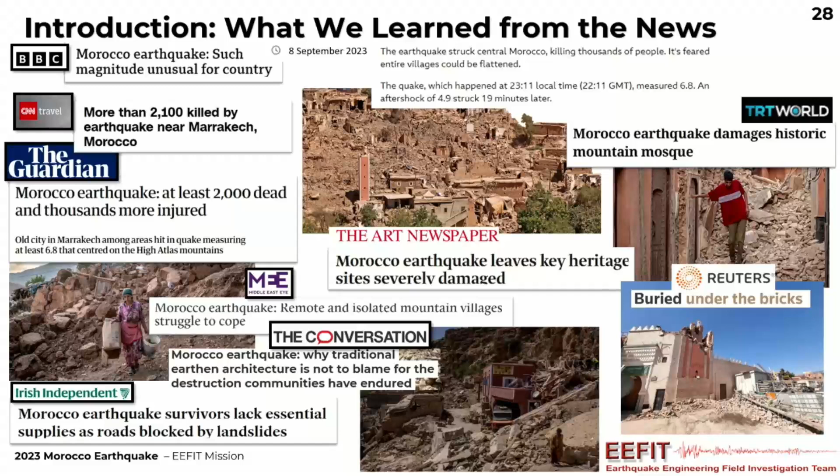As usually happens when this type of event occurs, the news coverage highlighted the human impact, but there was very limited detail about the technical aspect of what happened on the field.

So EEFIT, as soon as this earthquake occurred, decided to launch this eight-man project that, as has been mentioned by Mike, we actually at that time were running out of funds. So we applied for UKRI funds under the NERC urgency grant, and we got a grant for 18 months.

This was to assess and try to understand much better the earthquake process in arid mountain environments, combining multidisciplinary expertise across structural engineering, geotechnical engineering, geology, geomorphology, and remote sensing.

The idea was to use this time to try to understand the key factors driving landslides, and also the geotechnical building failures at urban scale and also at more detailed scales.

All of this was aimed at trying to understand how we could reduce the impact of future earthquakes in Morocco, but also in other geographical settings that are very similar to Morocco from a geomorphological point of view, and also buildings.

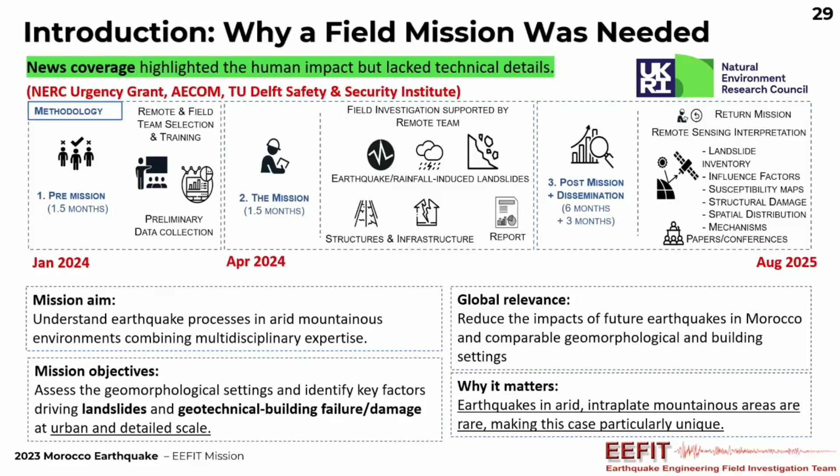These missions were led by Fabio, Mike, and myself. As soon as these earthquakes occurred, we asked EEFIT members to express their interest in participating in these field missions, and based on their expertise and interest in the mission, we created different teams.

As you can see, we had a landslide team, a structural team, and also a remote sensing team. All the expertise was fundamental considering the type of events that occurred.

Also, we had support from remote sensing, and then when we started the project, we found out the way to collaborate with local partners. We had local partners from universities and NGOs that have been fundamental from the logistics point of view, and also to understand exactly what was happening on the ground.

Having said that, I'll pass the floor to Mike so you can talk about your part. Thank you very much, and thank you, Fabio.

What I'm going to be taking you through is the geological aspects, and then the earthquake-induced landslides, which was one of the core reasons we were looking to investigate the Morocco earthquake, and also some of the geological and geotechnical observations that we observed.

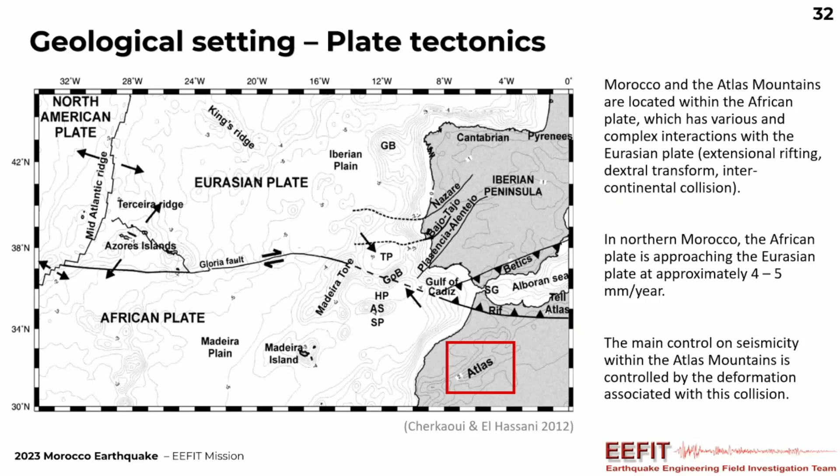4 to 5 millimeters per year, and that's the main control of seismicity within the Atlas Mountains, controlled by this deformation associated with this collision, which is why this sort of event is quite rare at this magnitude.

Historically, within Morocco, there have been about 25,000 earthquakes in the region since 1901, but only about 9 greater than magnitude 5.

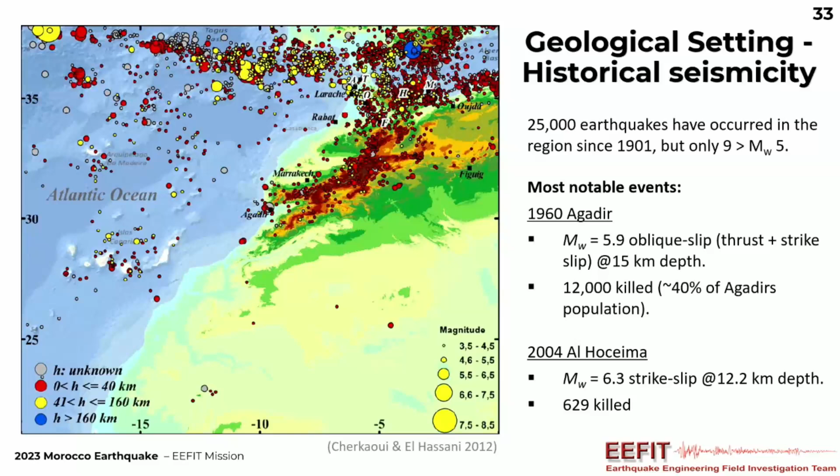The most notable events were in 1960 in Agadir, a magnitude 5.9, which killed 12,000 people, and then in 2004, a magnitude 6.3 killed 629. So large events in Morocco are quite rare.

So the main shock occurred here on September 8th, a magnitude 6.8 with approximately 3,000 fatalities, and it was the most deadly since the 1960 Agadir earthquake.

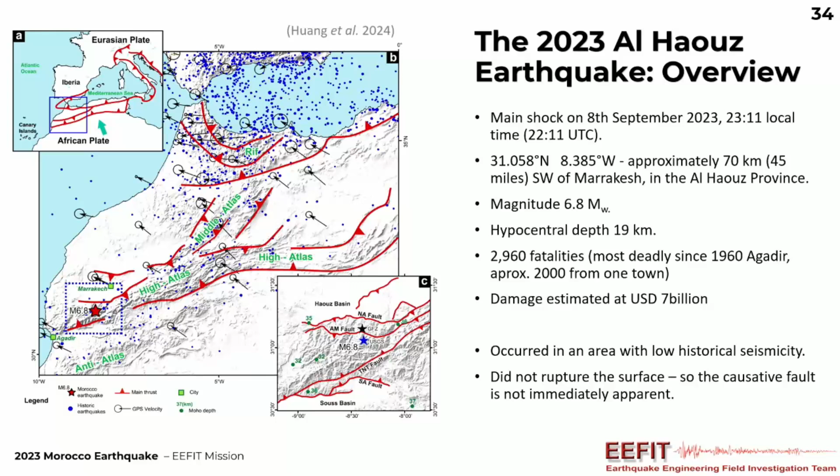Unfortunately, approximately 2,000 people from one town were killed, so a large number came from one village or one area. The damage estimation was estimated at 7 billion, and it occurred within an area of low historical seismicity, and it did not rupture the surface, so the causative fault is not immediately apparent.

So the initial thoughts and theories were that there were two possible mechanisms: on the left-hand side, a high angle north-northwest dipping fault, or a low angle south-southwest dipping fault.

That was the idea, but the aftershocks after the event seemed to indicate that it was more aligned with the low angle fault.

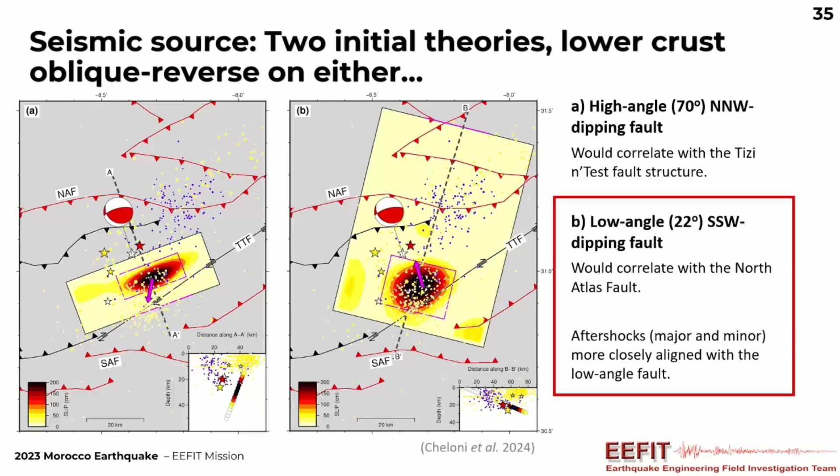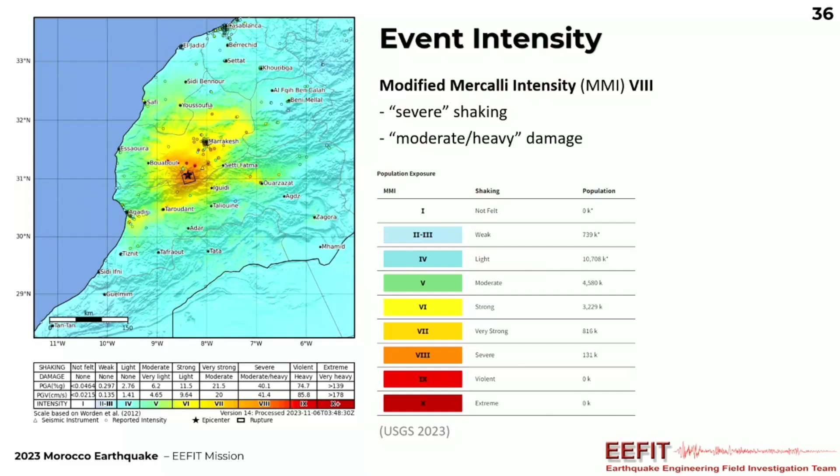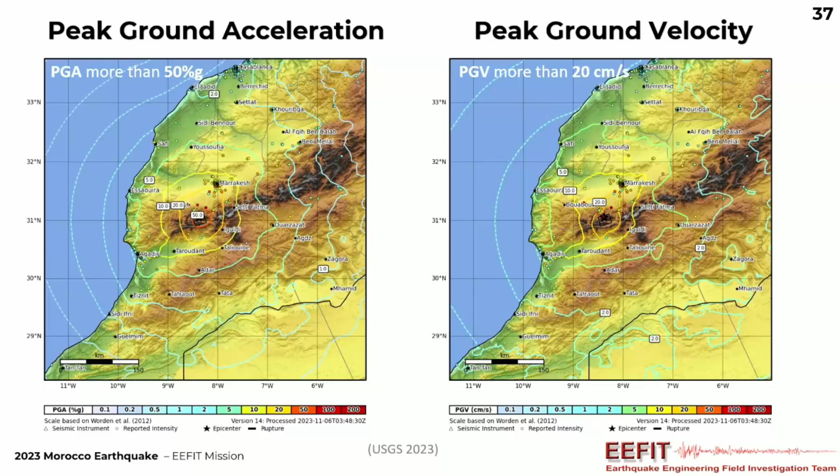The event was recorded on the Mercalli scale as being severe, with moderate to heavy damage within the area. Peak ground acceleration ranged from around 50, with peak ground velocities in the region of 20.

So that gives you a little bit of the geological and seismotectonic background.

This basically focused our minds around the NERC grant and the EEFIT mission, looking at earthquake-induced landslides and the impact that they might have.

One reason we're interested in these landslides is they not only have immediate impact following the event, hindering the immediate rescue and recovery, but they also have long-term impact in the landscape, causing decades-long impact, potentially leading to future landslides and future impacts in the area.

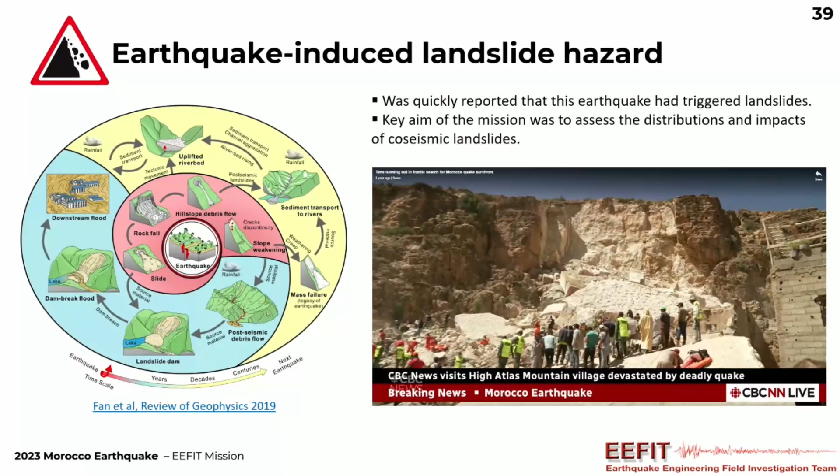So it's a really interesting case study of looking at why these landslides were occurring and the impact that they had.

So just to talk about the geological setting again: it's an intraplate tectonic setting where large earthquakes are rare. Its climate is arid, and the typical relief of the area we investigated was 2 to 4 kilometres.

For the non-specialist, the bedrock geology was quite broad - shown here on the geological map as a range of Cambrian schists, Jurassic limestones and Triassic sandstones. The soils, which we'll come onto later in the geotechnical observations, were typically coarse quaternary alluvial gravels.

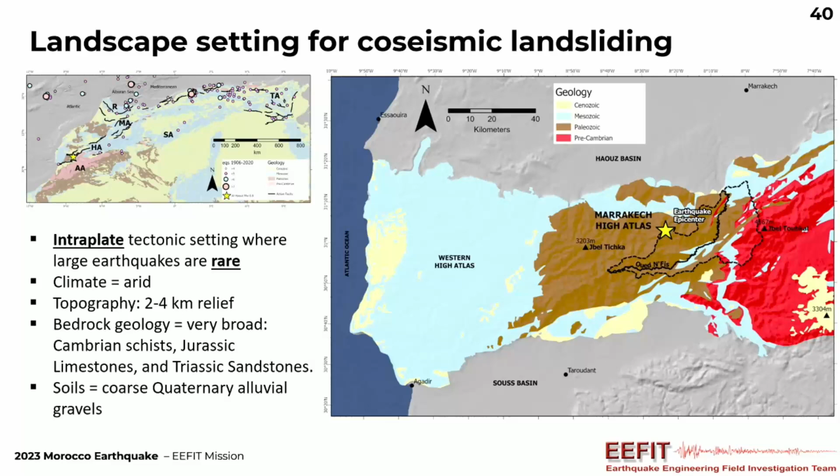Our initial approach, as Viviana talked about setting up the mission, we had a 1 to 2 month window before we launched in person, and looked at using a range of remote sensing techniques - lessons learned from the Haiti mission, which we did remotely, gave us the opportunity to investigate techniques applicable to post-earthquake, post-disaster scenarios.

The team from Delft, led by Georgia, initially looked at using synthetic aperture radar, supplementing that with optical imagery. This lets us cover a huge amount of area very quickly and start to pick out some of the major features.

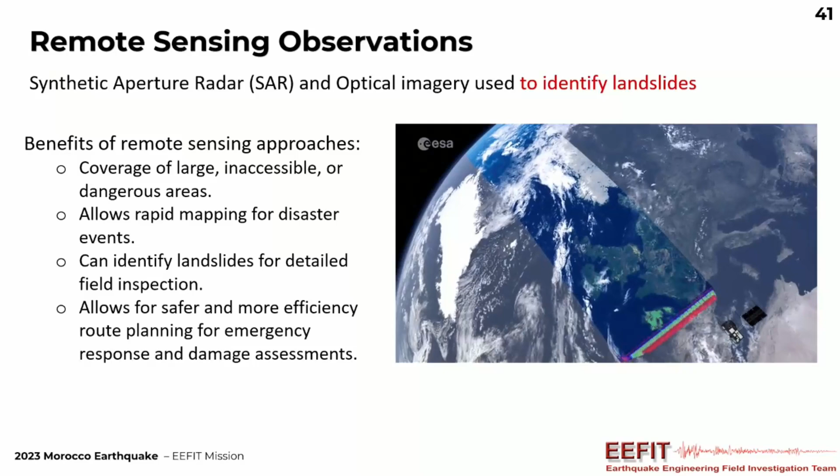It also allows for effective planning of the mission. Obviously the mission is only a week, 10 days, and this allows us to focus effort on the areas of most interest.

We'd had quite a lot of success looking at using SAR to identify landslides, using the intensity map when we did it from Haiti.

But what we found, using the Sentinel imagery which was 10 metres, was that it proved insufficient in this case.

The problem is that in Haiti, the landslides occurred in highly vegetated areas which became devegetated, so the contrast and intensity on the SAR amplitude was quite high, and they stood out. But in this arid climate, the landslides were much smaller, and the intensity and reflectance contrast between the landslide and the arid environment was not strong enough to effectively pick these out at 10-metre resolution.

At 10-metre resolution, you're typically going to be looking at a landslide greater than 100 metres squared - it's got to be a reasonably sized landslide. You can't pick out a 10-metre landslide; you've got to have several pixels. And you'll see from some of the photos and images that a lot of the landslides were quite small.

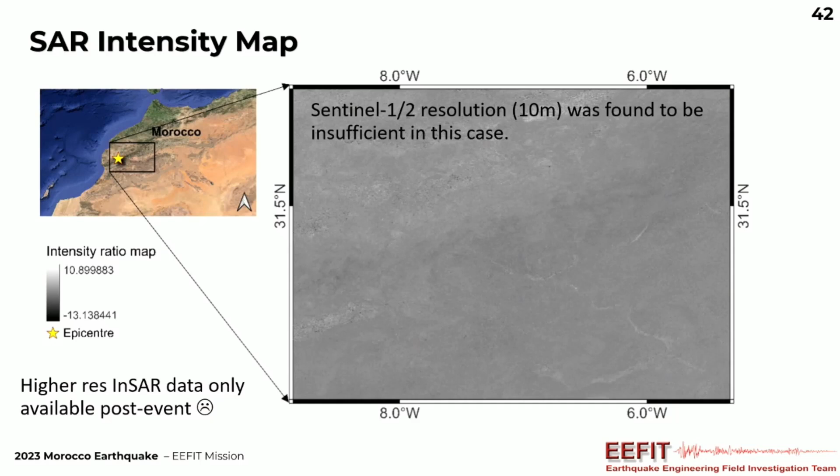Unfortunately, the higher resolution InSAR data was only available post-event, so that's in the centimetre to metre scale. We didn't have pre and post imagery to identify the landslides, so that took us back really to the times pre-InSAR, where we were looking at optical imagery. We were quite fortunate that Maxar released quite high resolution, 30 to 15 centimetre data, pre and post imagery.

In the centre there, pretty much the area where we had good pre and post imagery is shown in green. In orange was where we basically had no post imagery, only pre. But you can see we had quite good coverage adjacent to the epicenter.

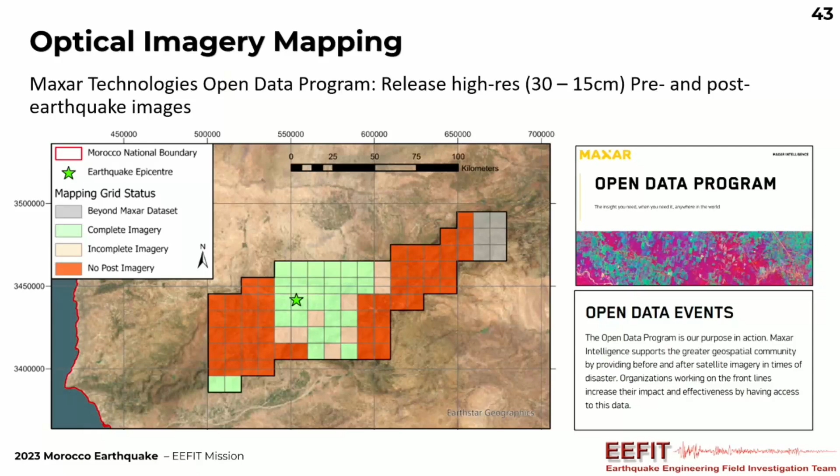So this is an example of the Maxar data pre and post imagery. You can see the before, and then the red dots picking out some of the landslides after. As you can see, there's quite a lot of distortion within the imagery. This is basically geodetic, so it's not really been topographically corrected. This actually caused a lot of problems in being confident in a lot of the landslides we identified, and obviously there were a lot of data gaps that also hindered.

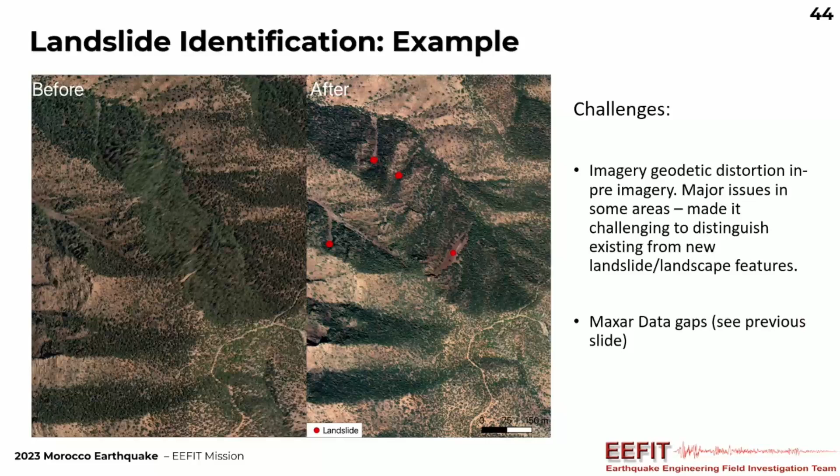But we were able to identify quite confidently 464 landslides. Since the field mission, we are actually going back and remapping with that renewed confidence of what we're actually seeing in the aerial imagery, of what is a landslide and what isn't. It's likely that this number will increase slightly.

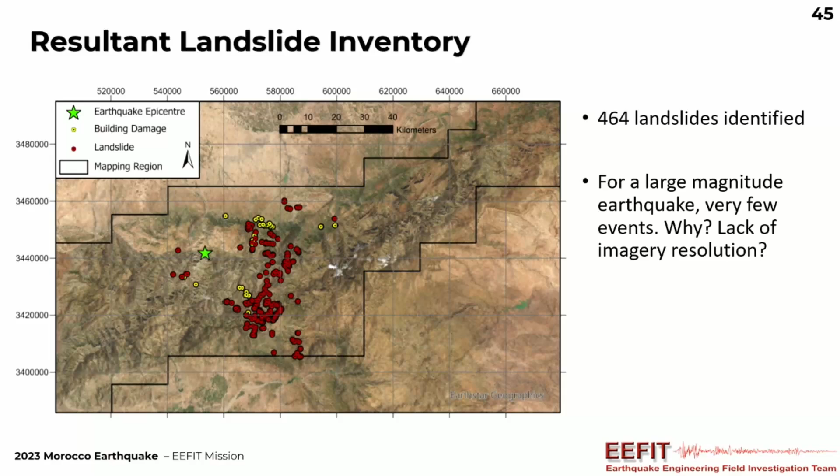For those who attended any reports on the Nepal mission, 464 compared to Nepal, where they had over 26,000 landslides. So compared to what the news said, to what we actually saw, the perception that there were huge amounts of landslides was not actually the case. So why was that? That's really one of the research questions we're still investigating.

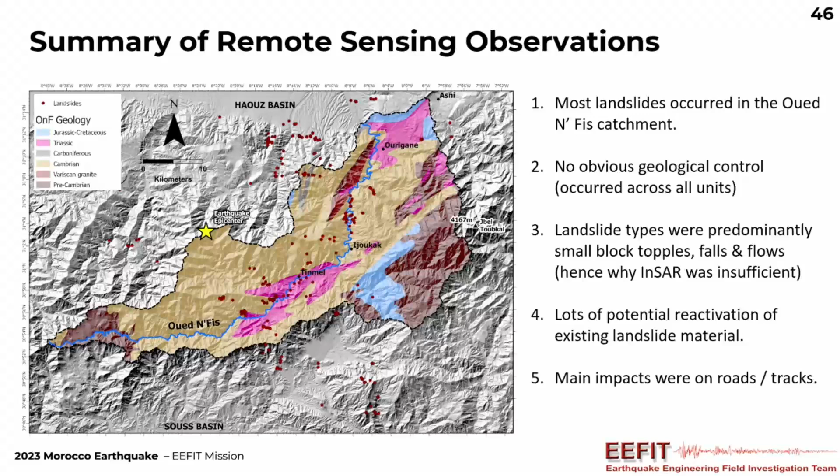So that was really the remote sensing aspect. What we then went to do, just a very quick summary, is looking at the field validation for the landslides. We used one of the main roads, the R203 I think it is, mapping along that road route, which is where a lot of the landslides occurred within close proximity.

What you can see is a lot of these are initiating at sharp breaks in slope or changes in slope, which is quite classic for earthquake-induced landslides. There's quite a lot of work that's been done which identifies topographic amplification and topographic effects that have quite a significant control on landsliding.

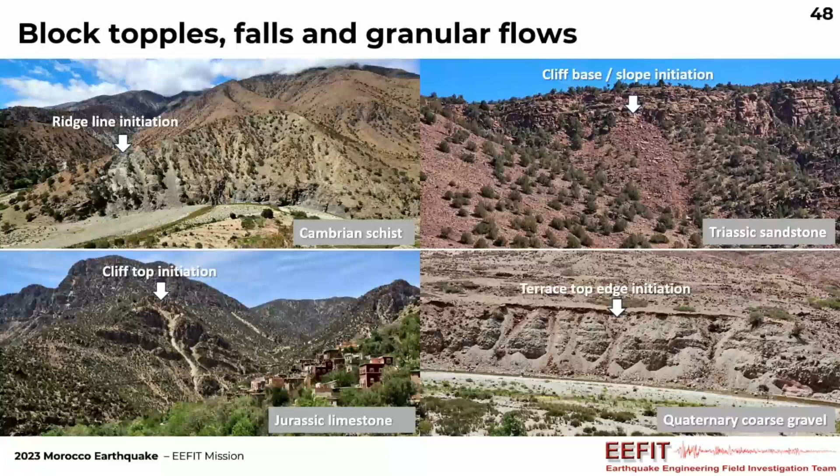Now we do have a little bit of a problem. There has been quite significant reactivation of existing landslide material, so obviously that's a causative factor, looking at where existing landslides were. But some of them, both in the field and within the aerial imagery, was quite difficult to identify whether reactivation had occurred.

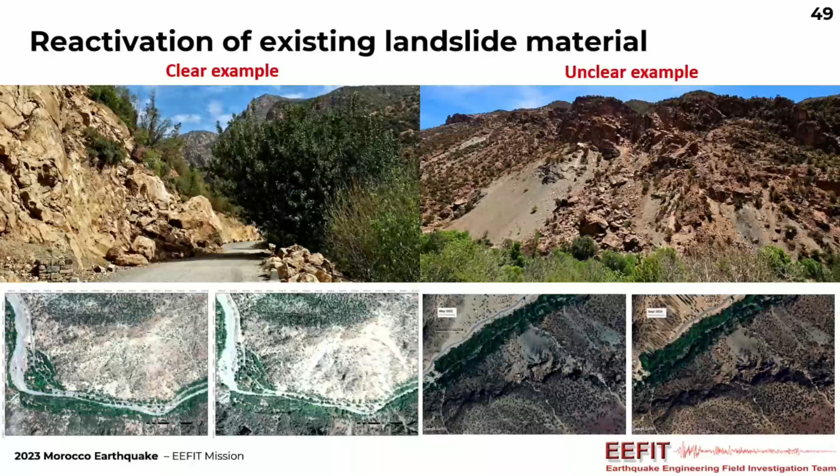But it's also worth bearing in mind that this is a very rural community, and rural tracks are also quite significant, as that's the way they travel to get into the remote areas where their villages are - we're talking motorbikes and on foot. So a lot of rural tracks were also impacted, still ongoing over time. We did identify some minor impact to telecommunications, but by the time we visited in the mission, that had already been repaired, so quite quickly after the event.

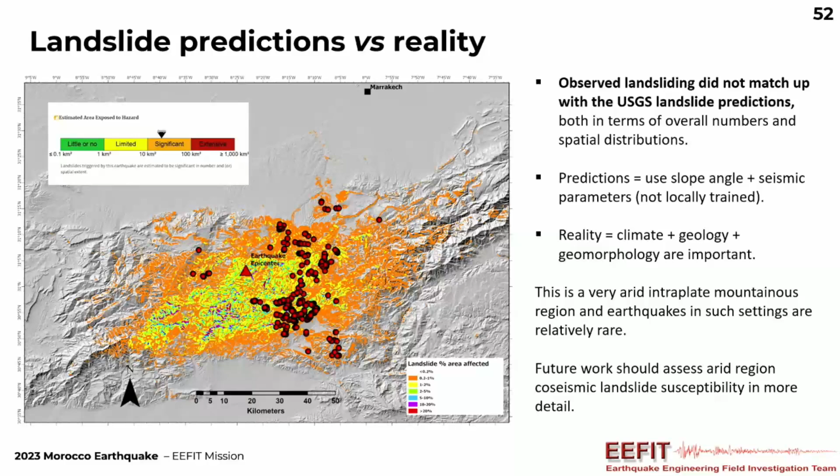So this is something we probably need to investigate further in the future. So just very quickly, some of the geotechnical observations beyond purely the landslides. Now, interestingly, there were not as many as we'd anticipated. That wasn't due to the earthquake, it was just the fact that not a lot of geotechnical structures really existed. So this is just some slides.

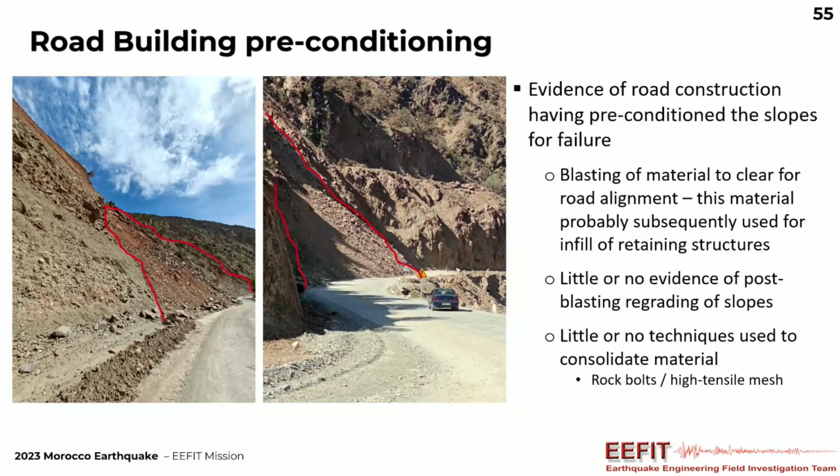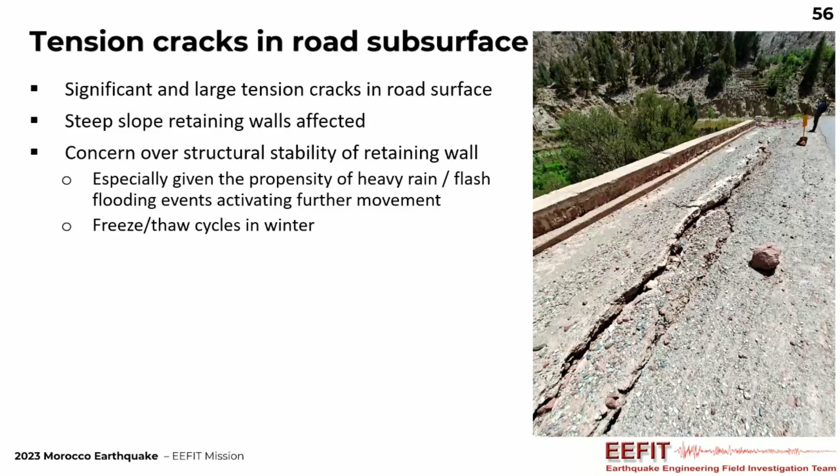We identified also a range of tension cracks within retaining walls and minor impacts to structures. The fact that we only saw a few is because only a few really existed. In this case, it was really probably due to the way it had been built out. You can see here that this is built on a bend, so what they've probably done is excavated into the cliff, then side tipped, and then built the road partly on the side tip and partly on the rock.

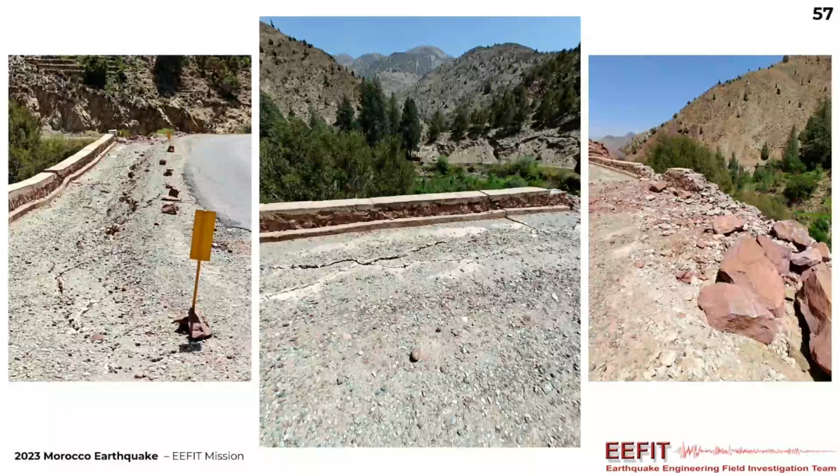What has probably happened here, although we couldn't really get down slope because it was quite steep, is that the tension crack is interfering along that interface between the fill and the rock, and the change in amplification and signal has caused some of those failures. You can also see in this picture there's quite a lot of rock falls that have caused a range of different damage, sort of quite minor damage, to some of the retaining structures.

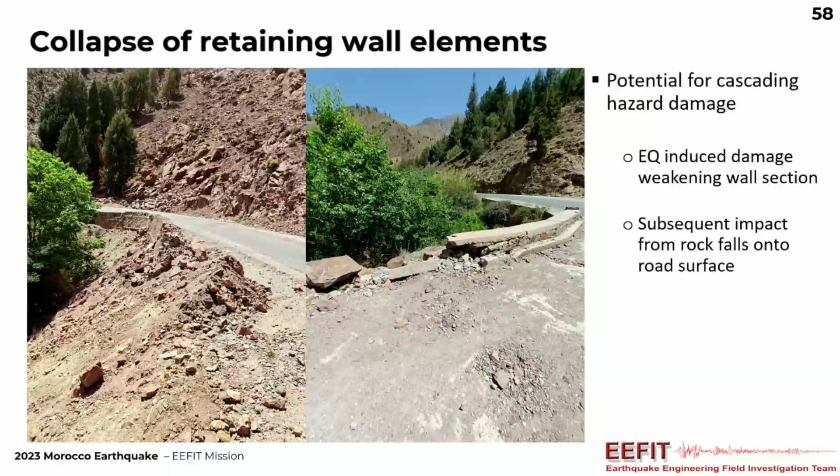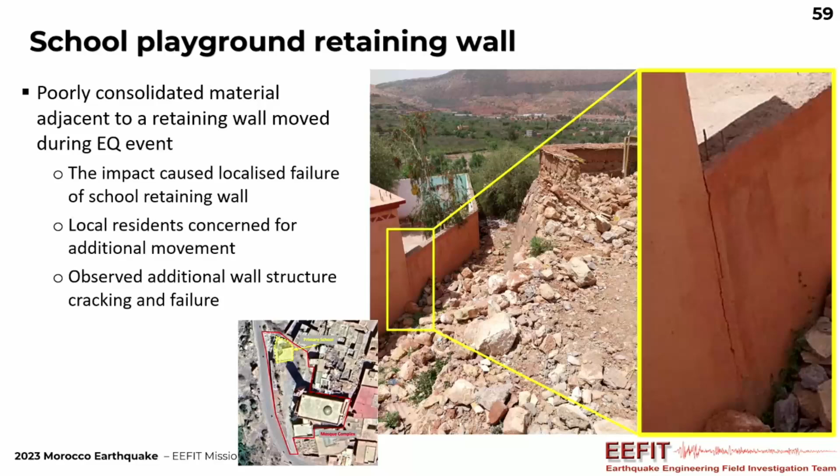So just finally, as a little introduction into looking at the building damage and linking the two, we started to identify - we initially went out there looking at landslides, but as we were moving around the landscape, working with Martin and others, it started to become clear that geology was playing quite a critical control on building damage.

This is an area we're looking to investigate further, but it looks like a lot of the building damage was on these superficial deposits. Locals build on these areas for cultural and economic reasons, often flat-lying areas where it's easy to excavate and build foundations. We started to identify, and further work is being done to investigate this link between geology and building damage. It was becoming obvious that a controlling factor was the quantity and quality of buildings on these soft superficial deposits, but further work is required.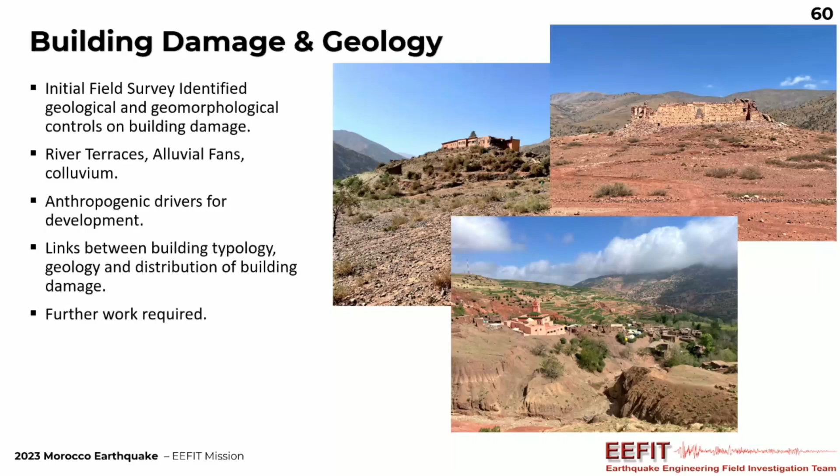Now we're going to talk about what we have done looking at buildings. This is quite what we were observing when we were driving all around in Morocco. As mentioned, these villages are very often built on mountains, and they become quite isolated when roads are completely blocked by landslides. Also, these villages are very often self-built, so people in the villages build their own houses, meaning they use substandard materials, and very often there is very little input from engineering.

When you go through these villages, it's very complex to understand what is happening, because you can see so many different buildings that are also very difficult to associate to worldwide classifications of buildings. We'll discuss this more in detail when I go through explaining the damage and failures, but this is just to give you a picture of what we were seeing when we were around.

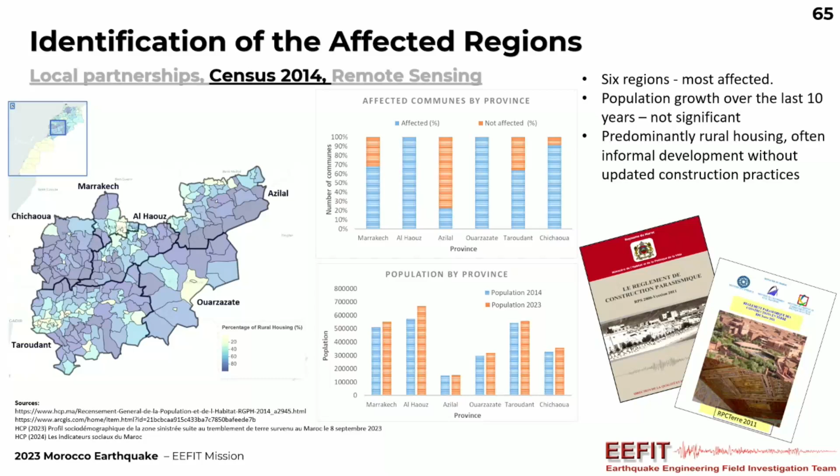So as a second step, we looked at the census to try to understand the building age, the floor materials, the wall materials, and roof materials. This is from one of the regions considered one of the most affected.

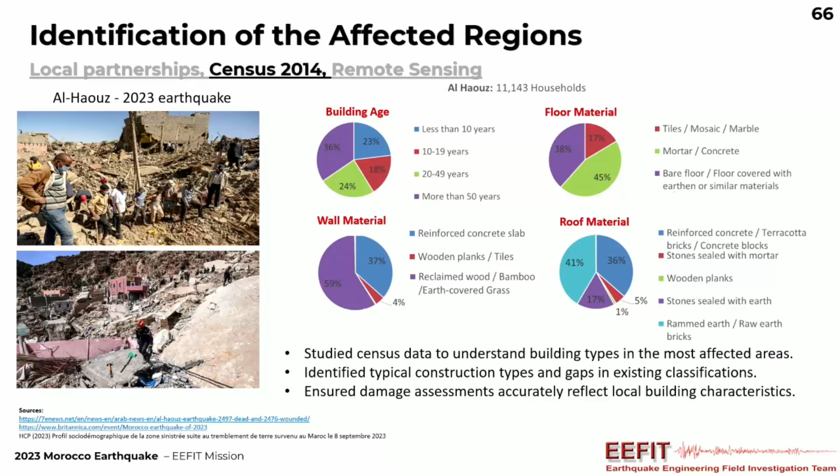These are very informative because we compared what we've seen from the census with the observation on the site, and we will come back to this slide later. Then remote sensing, fundamentally, to try to understand the regions that are most affected.

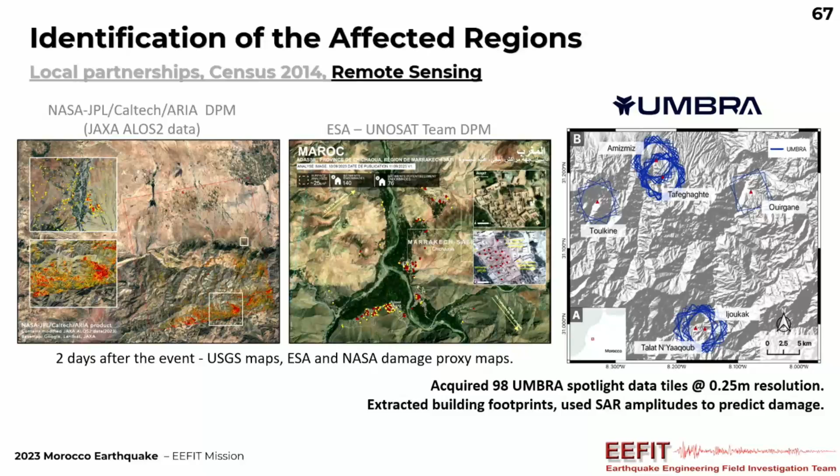During this phase, the remote sensing team was acquiring different spotlight data that was later used for extracting a building footprint and to calibrate tools to predict the damage.

Once we identified the regions, we prepared our own form for the data collection. I know there are many different data collection apps and tools available, but as you've seen from the beginning, it's very complex. It was really complex for us to use one available tool because the typologies are very complex, and we wanted to make sure we were very effective when we were on site.

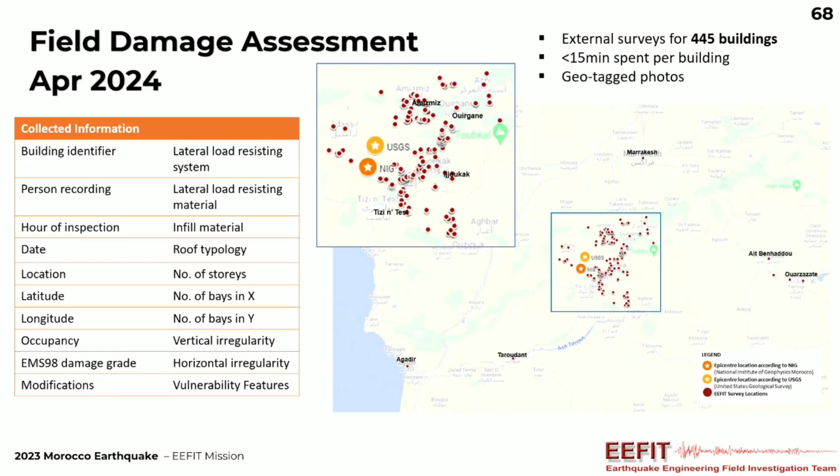So these are the information we were collecting, and these are the buildings we had when we were in the field: 445 buildings with a very simple form that takes about 15 minutes to fill, and we were taking a lot of geo-tagged photos.

So what you see here is the main typologies we identified: confined masonry, the major one, something we call mix, and we'll see later what that means. Then we have some traditional construction, rammed earth and stone, a very small percentage of reinforced concrete buildings, and some that were difficult to identify.

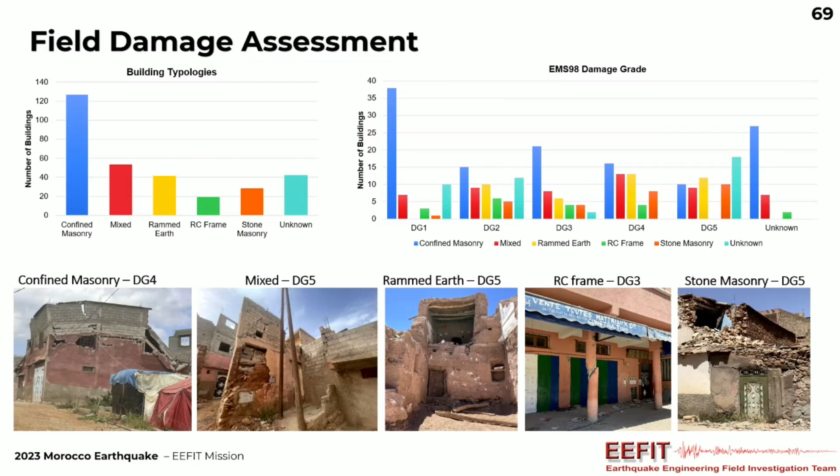We classified all these buildings through the EMS-98 scale, and here you can see the distribution, but we'll come back to this damage distribution later when we talk about the single typologies.

One thing I want to highlight is that these are the major building typologies we identified in the field, and this is the data from the census. By comparing those, we see that the highest percentage for the field is confined masonry, while for the census 2014, the major one is...

Oh, that's the wrong one, I just put the wrong slide in, there was just a mismatch completely. This is for the floor, sorry for that, I just realized. But there was a complete mismatch between what was reported in the census and what was reported in the field.

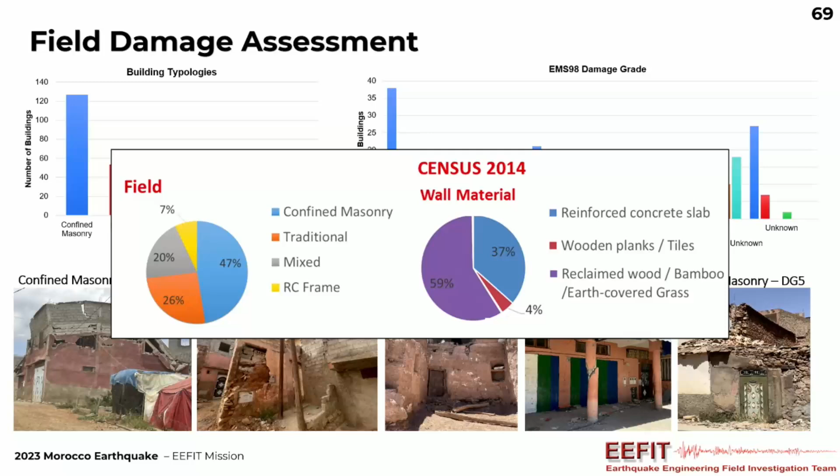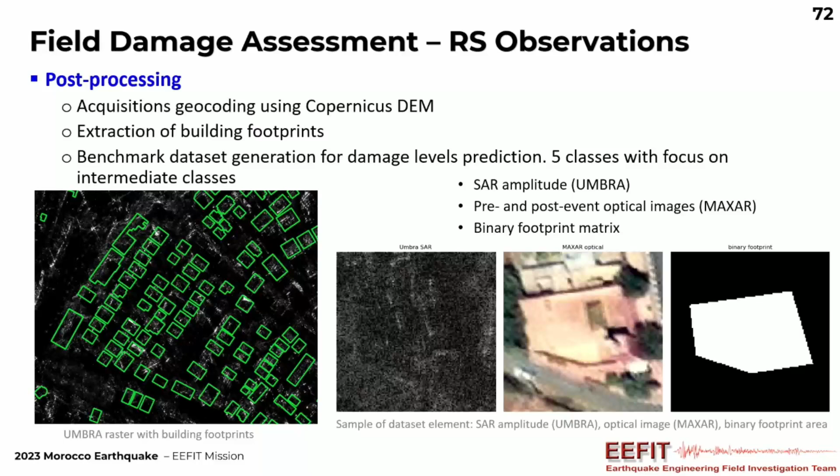So we also used remote sensing to make maps where we mapped all the data in terms of damage and typologies. At the moment, the remote sensing team is using our field data to calibrate the tools and try to predict the damage based on the 5 classes, but mainly concentrating on the intermediate classes, so DG2 and DG3, which are most difficult to identify by remote sensing.

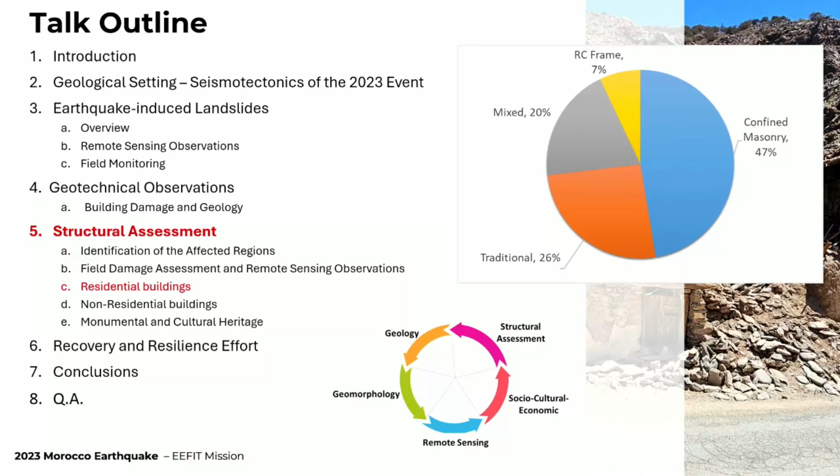Now what we're going to do is talk about the structural assessment in detail, discussing exactly which failures we observed on site. These are, as I said, confined masonry, the major one, but we'll start from the traditional construction.

As Mike mentioned, some of these villages are built on flat alluvial river terraces. Maybe this is one of the causes, because they amplify the ground motion. Maybe this is one of the reasons why there was so much damage in these villages.

But there are also construction details we looked at that have shown very poor performance. These are the main materials that characterize traditional buildings: stone, which can be rounded or flat, or rammed earth in the form of walls or blocks, and then traditional roofs.

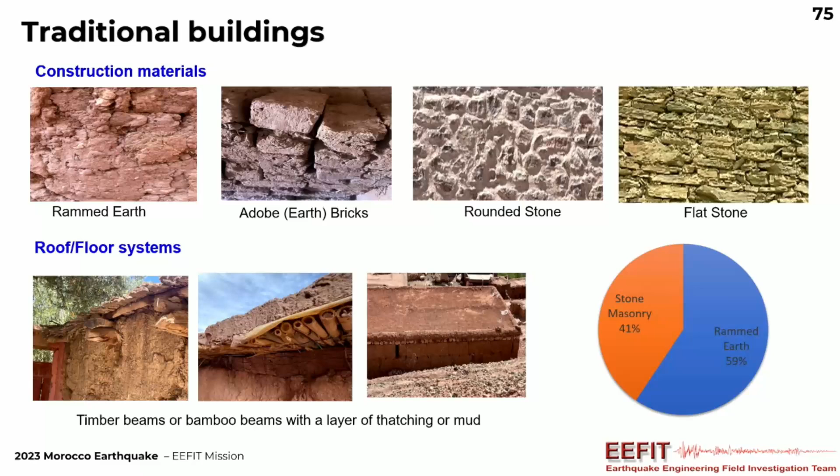These are the types of buildings we saw on site made from earth. They're made of blocks, but very often these houses already have very significant cracks along the different blocks. You can see these cracks that most probably are not really caused by the earthquake, but are pre-existing damage due to a lack of cohesion in the materials, most likely connected to very poor compaction of the material when they were making the walls.

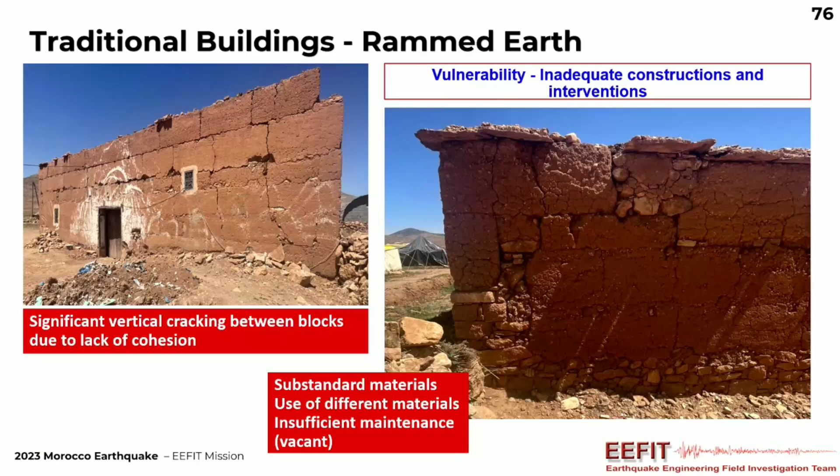But there's more: many of these houses originally made of rammed earth have stone foundations, but some parts of the walls have been replaced with stones, so there's this use of mixed materials, which makes these houses very poor in performance. There's also a lack of maintenance, partly because many of these houses are vacant or used for animals.

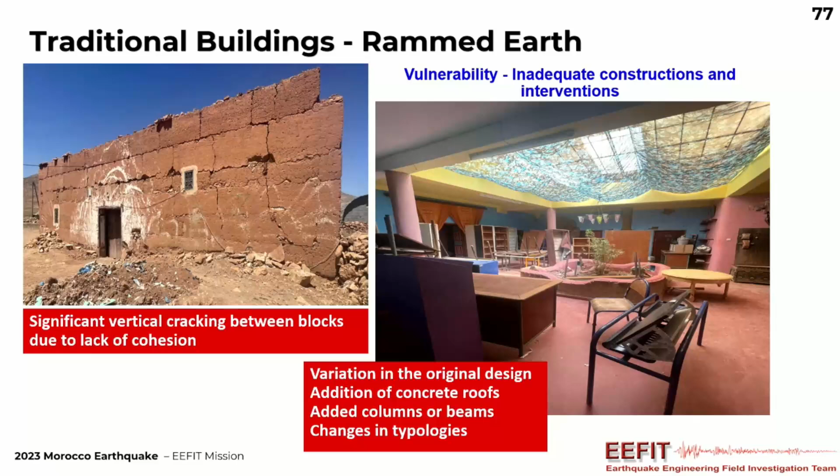And then there are the ones that are still rammed earth but have been completely reconstructed internally. From outside you cannot really tell, but when you visit the houses you can see they have added frames and columns, completely changing the typology and performance of these houses.

Here we can see some of the typical failures that we can observe. I'm not saying anything new up to now. These are out of plane failures, so you can see the separation between walls, or very important corner failure, as you can see the one on the right.

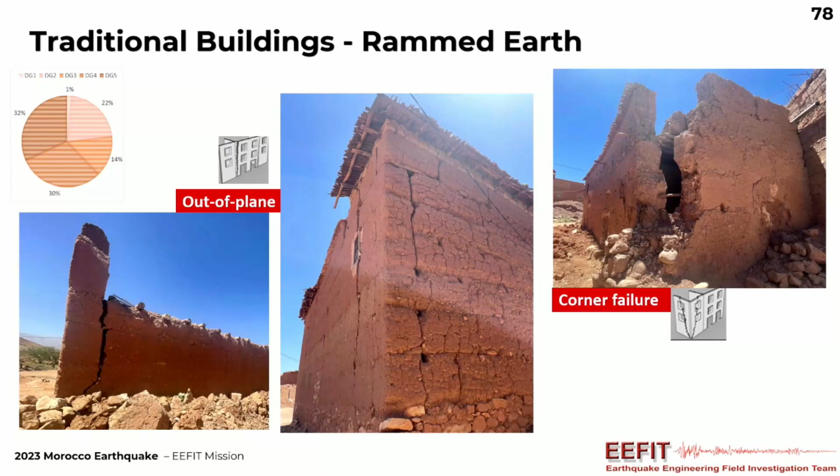But what is interesting actually is to look at them more in detail, and many of them have these pegs that, as you can see, are very ineffective. Pegs that are very smooth.

There is a complete loss of the mortar, probably from the earthquake, probably not, we don't know exactly because it was very difficult to say by looking at these houses. But definitely there was a presence of knowledge that has probably been lost over the years, over time, because there is a presence of these elements, but are they effective?

There isn't really a pattern that you can say how these pegs have been inserted into the walls.

Same thing also for stone masonry buildings, we have found in different cases these pegs that are inserted between the walls. And it's very interesting to see that these dowels in the corner are done in order to prevent, so in some way they have prevented overturning of the walls.

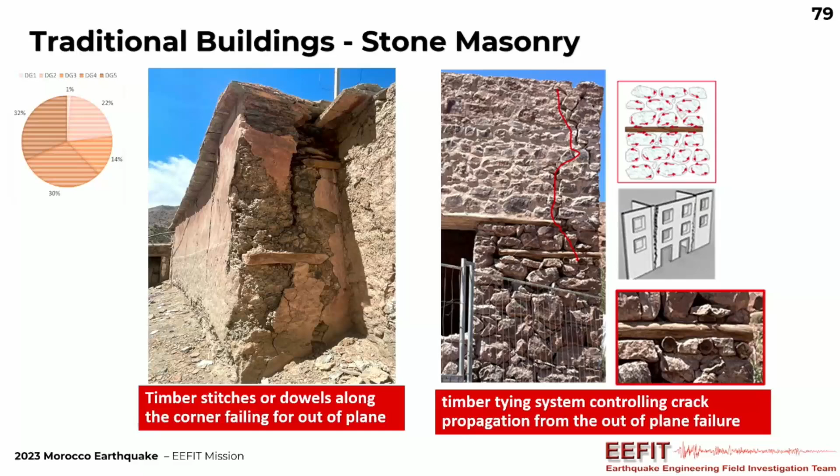Here in this figure, on the right, it's much more interesting because you can see that there is a crack, and that crack stops really where there is a peg. But then probably there is nothing on the top. So it looks like the presence of these ties in some way controls the crack propagation.

With stone masonry, the major issues are the stones, because very often the way they are built is multi-leaf, so they have external leaves, and then they are filled with loose fill or maybe some mortar and smaller stones. The problem is that this leads to leaf separation of the walls.

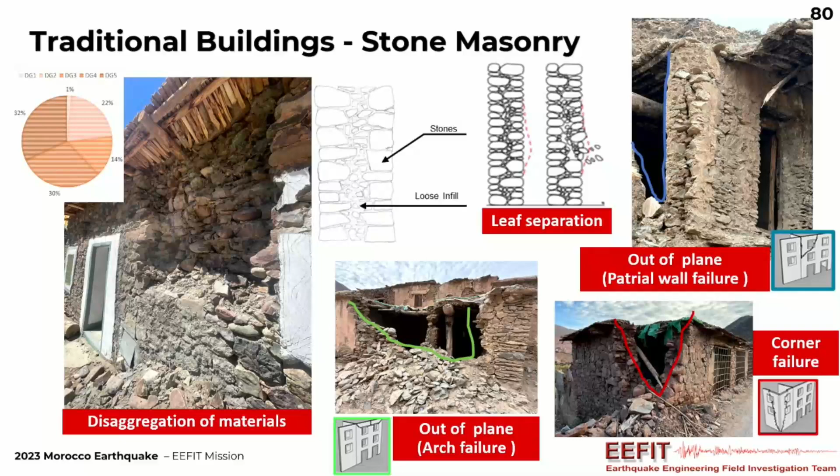So in the first case, we have just some disaggregation of materials, but this type of leaf separation can cause even major failures. We can see here different types of out of plane failures, like arch failure when we have a significant loss of materials, also corner failure.

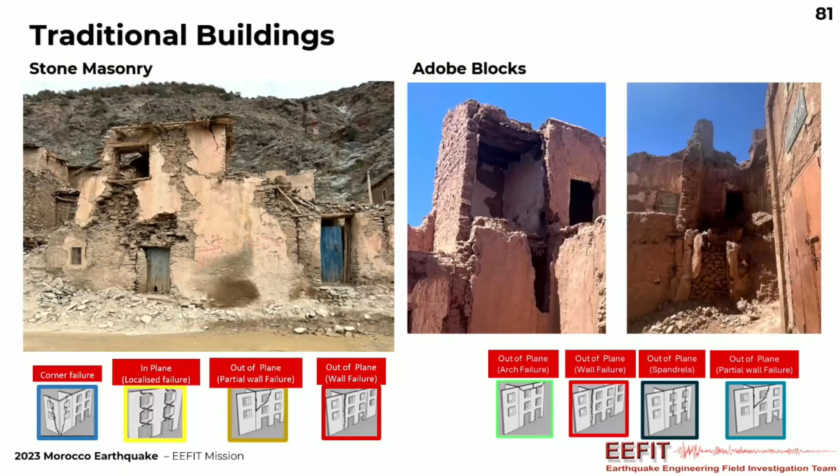It's very difficult to see that because the problem with these houses, probably the most complex thing about looking into these typologies, is that it's very difficult to identify what is happening on the buildings because there are co-mechanisms happening at the same time.

I have highlighted in blue where we can see the corner failure, so there is a corner, there is also a wall on the other side that is failing. That loss of materials in yellow represents a shear failure, so on top of the spandrel, on the pier over there.

We have in red this out of plane failure, and then there is also a bit of a pounding effect between the two buildings. So it's very complex, as you can see, to understand what's happening on the buildings.

Same thing also for the adobe, very similar here, we have different mechanisms that we can identify. The reason why there are co-mechanisms happening is because there are so many different deficiencies on the building itself.

Sometimes you really need to try to understand what is happening. This highlights the fact that patterns are very difficult to identify. We know at this point probably which are the main mechanisms that occur on masonry constructions, but in this type of building it sometimes becomes much more complex to identify them.

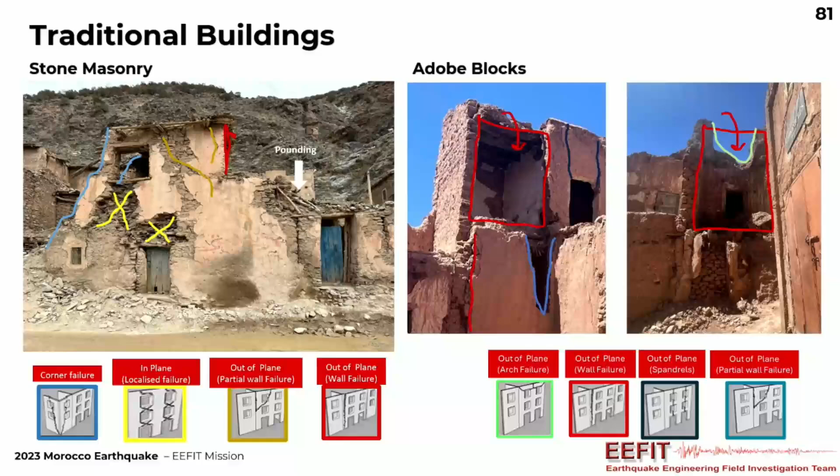The point is that there is a little bit of misconception of what traditional houses in Morocco actually are. I'm going to give you a couple of examples here. Here you see a few examples of what they mean by traditional.

When they talk about traditional buildings, they mean houses built with traditional materials, but combined with some modern materials like concrete. You can see roofs made of concrete, but unfortunately this is what we have seen as well - complete loss of the roof, and on the bottom you can see that beams are used as lintels and also as a ring beam.

These are the type of failures that we observe for this same type of what is traditional for them. So there is a lot of discussion on what we mean when we talk about preserving traditional houses, which is the best way of preserving, what information we're giving to locals, and whether it is correctly implemented.

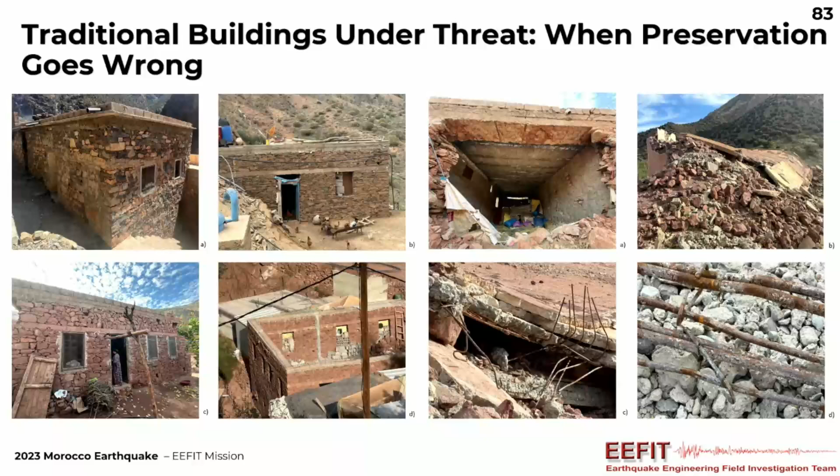This is also another example, very similar to what I mentioned - very often for them this is the new version of traditional house: a frame in concrete filled with stones. And this is what is happening - you can see this many times, everywhere, that these type of houses have this type of failures.

This is very common because we know that masonry works very well in compression, but these are systems where all the loads are taken by the frames, so there are not compression forces that hold the walls together. So this is the type of failure you see - an arch failure due to complete out-of-plane movement of the materials.

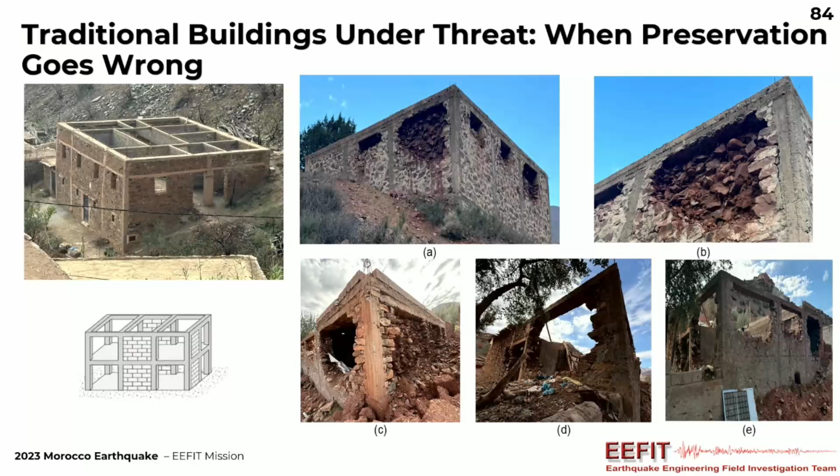Now I'm going to move to another typology that is the major typology we have found mostly here - confined masonry structures. There is a question: is this a very real confined masonry structure, or is it like a reinforced concrete frame? If you talk with the local people, they will say it's confined masonry.

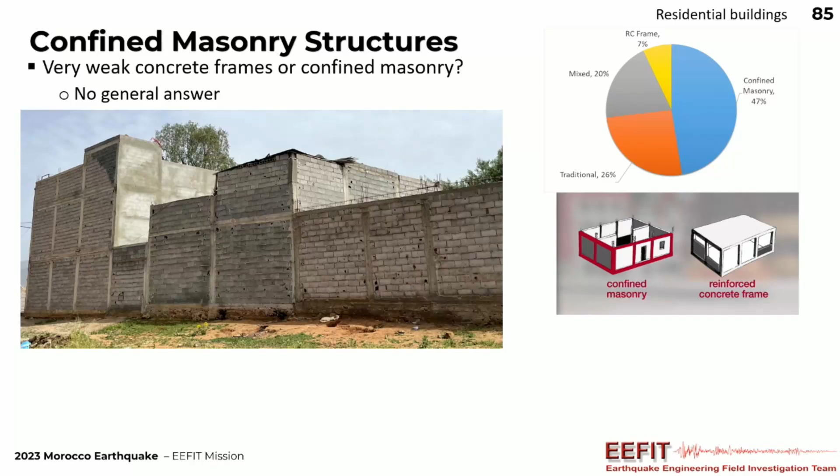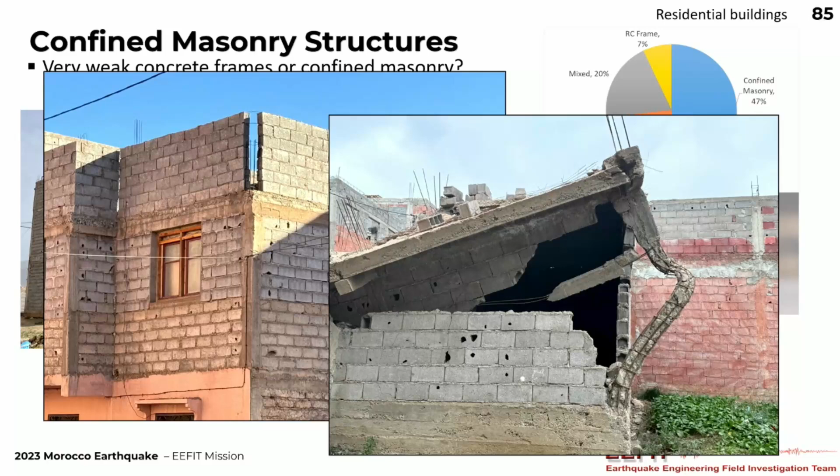Sometimes it's true, so they are built properly - they build the walls first and then they do the casting. But in some other cases, it's very difficult to say whether these are proper confined masonry buildings. You can see failures where the walls have detached completely from the columns.

Even though most of the confined masonry buildings, as you can see, perform quite well in terms of damage rate, I have reported here some of the most critical buildings that failed due to irregularity in mass, vertical irregularity, and these are the type of failures you can see that are due to weak connections.

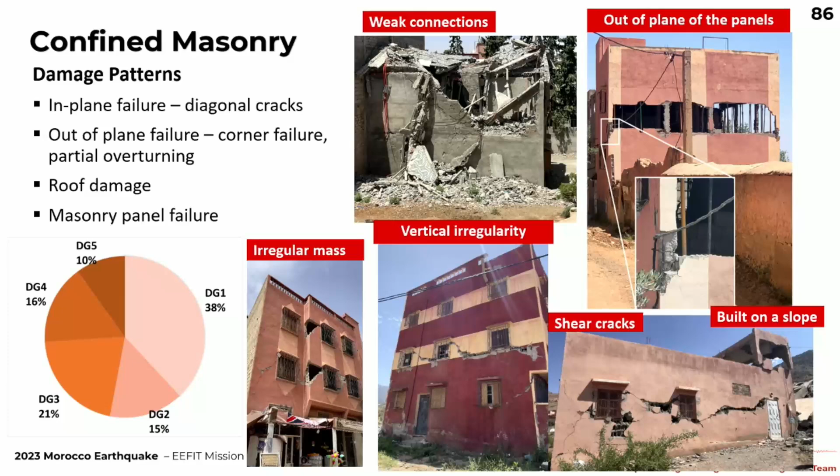So you have a roof that has collapsed, or maybe the columns have some hinges, and that's why there is out-of-plane movement of the walls and then collapse of the roof. Here are some other samples - very often these failures are connected to hinges in the columns, and this is a typical shear crack that we have seen for many of those.

Now we're talking about a big percentage of buildings that have been classified as mixed. I don't know whether it's the correct terminology in this case, because mixed is very much connected for us to the definition of staged buildings - these are buildings that have been built in stages. What does that mean? You see many buildings that are incomplete.

So they have walls, but they don't have roofs - the roof has not been built yet, maybe. So these walls become highly vulnerable. And then you have mixed in the sense that you have houses with a first level in stones, and then they added additional one or two floors made of completely different materials, like concrete blocks with some frames.

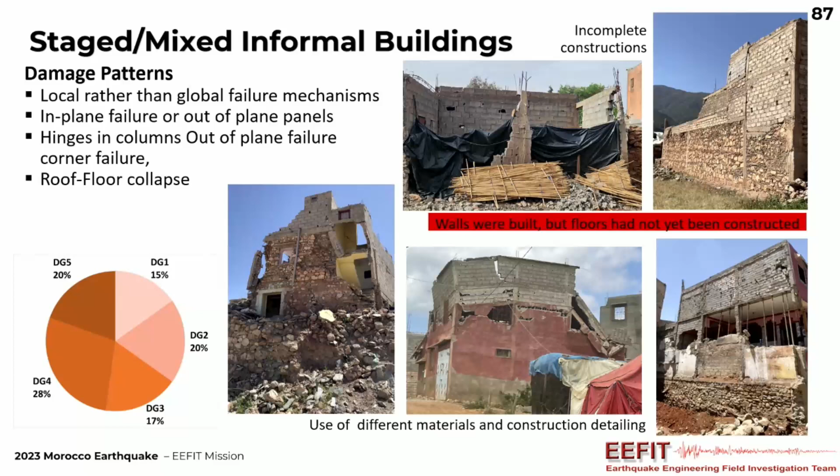And again, you see a pattern in that so many buildings have these mixed technologies used at the same time. But it's so complex - first, to classify these buildings according to international building classification; second, it's very difficult to understand the type of failures occurring, because every time the failure is connected to some deficiency of a specific material or technology. So definitely these are types of construction that need further study in trying to homogenize the existing classification.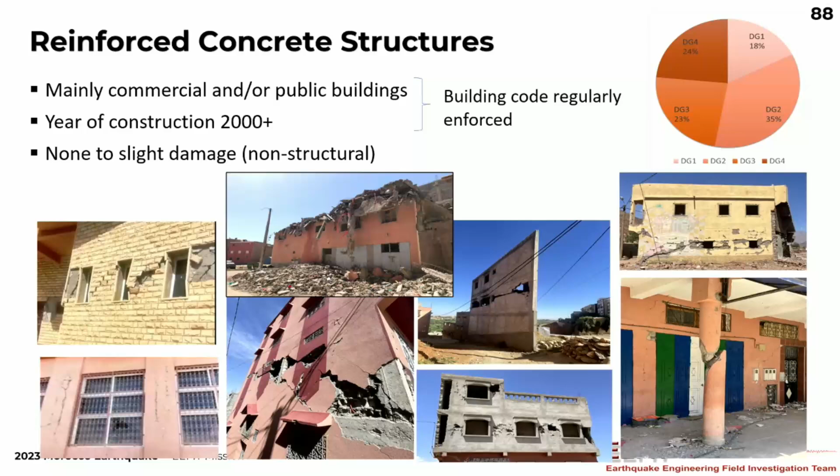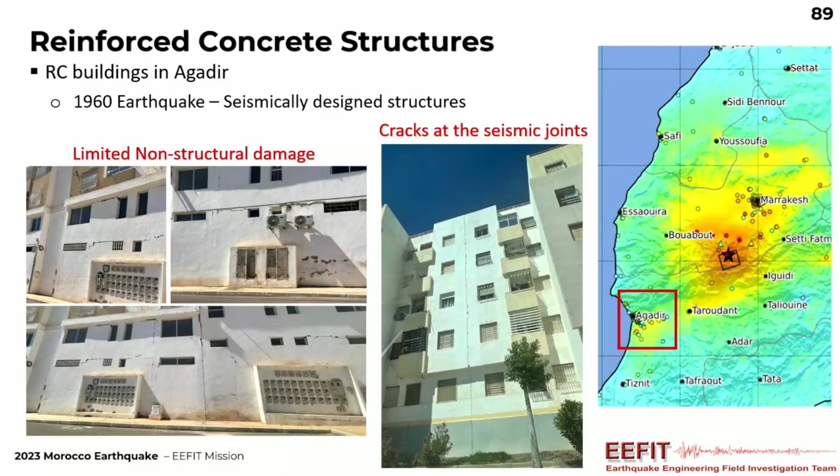What was interesting is that we traveled a little bit further. The star is actually where there was the earthquake. We traveled to Agadir, where there was an earthquake in 1960. The reason why we went there was because we were informed that there was some damage, even though the city was very far away. In Agadir there was these earthquakes, but you can see the type of buildings are completely different, definitely built following the standards that exist locally. So after the earthquakes, all these buildings have been completely rebuilt. Indeed, you can see some very little damage, some pounding, but very minor, very minor. And this is actually good news, let's say, in that sense.

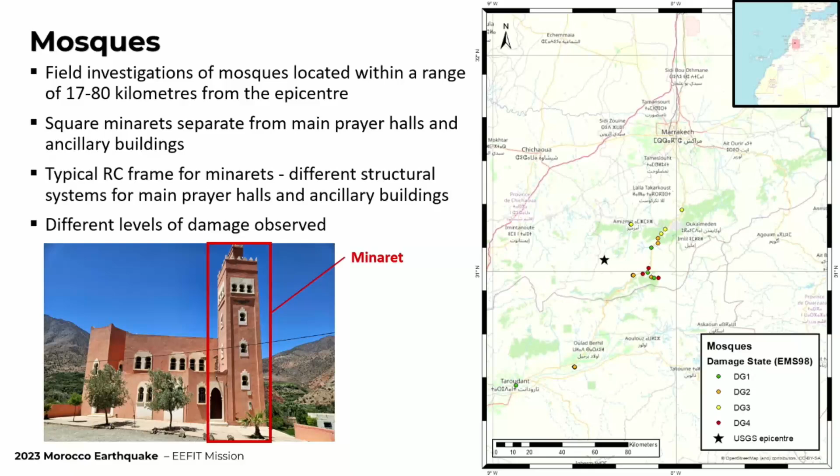We went to look at this mosque more closely, and went a little bit around. The major type of damage we have seen is on the minaret. Very often we see pounding effect between the minaret and the prayer areas, or some more structural damage on the minaret, but these are damages that can be repaired - this mosque can be repaired.

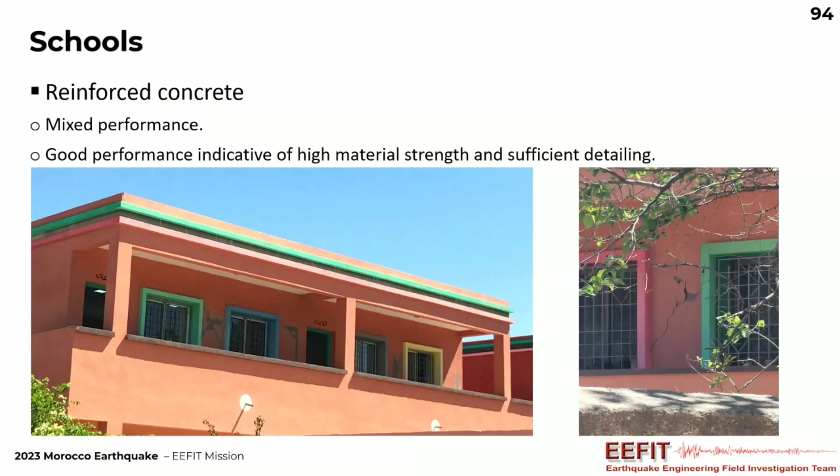Then we also went to some schools. Schools performed quite well, I have to say, apart from very minor cases. And hospitals were functional soon after the earthquake, so there was not any particular damage - the health facility was not particularly affected.

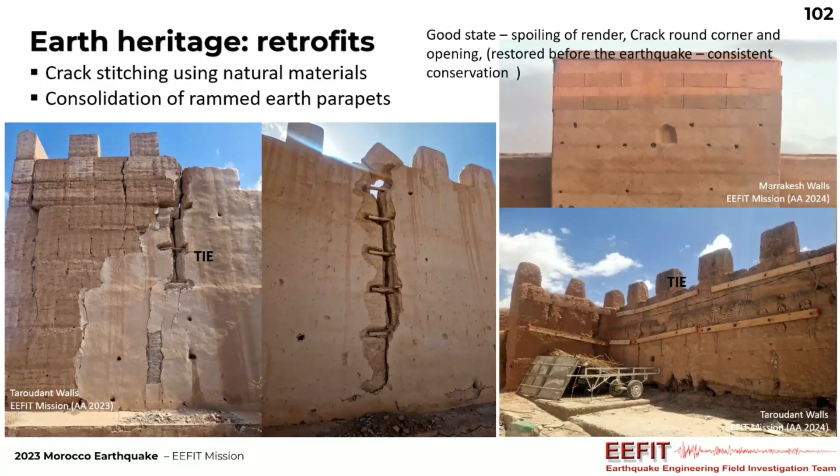You can see here in these pictures there is also the use of these pegs - they're actually built in the same way, very smooth pegs that are connected to walls. Of course they had an important role in the walls because the walls have not collapsed, but you can see that the mortar has completely lost. Also, on the right, some ties - that is also very common, visible in different walls, to tie the walls themselves, and then some stitches as well. So there was a lot of repair already done by the time we went to the field.

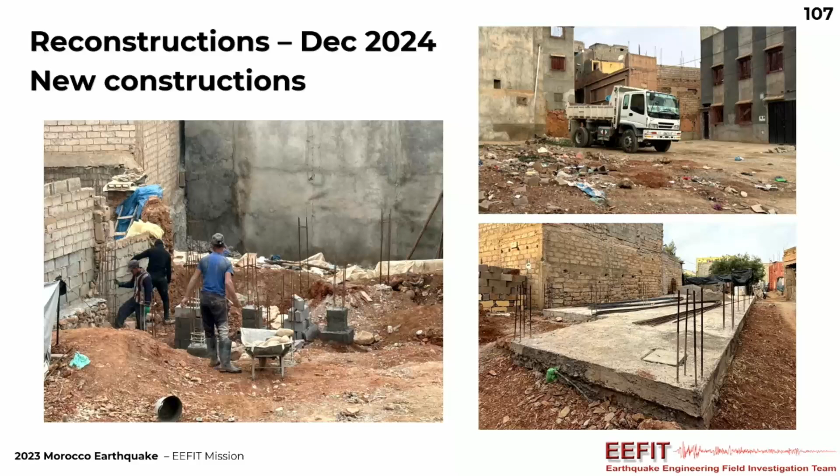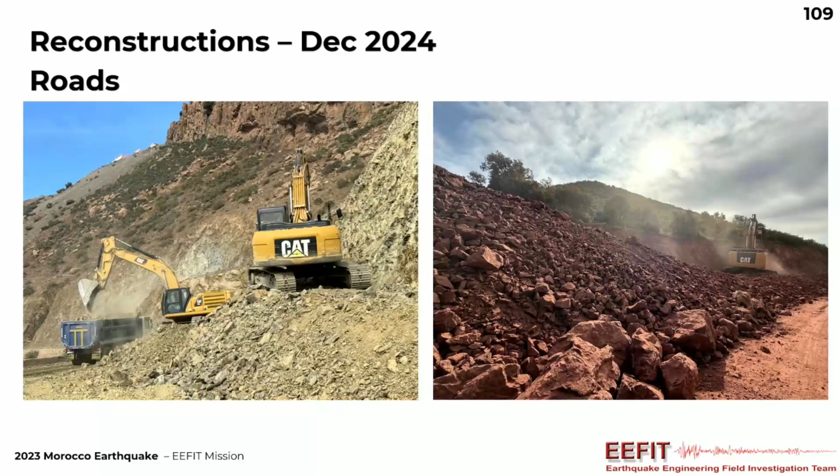I'm not going through everything since many things have been mentioned already. But from the landslide point of view, SAR and optical images were able to identify landslides, 464 in total. This number seems not large for an event like that - the news made us much more worried - but this doesn't mean the landslides don't affect the communities.

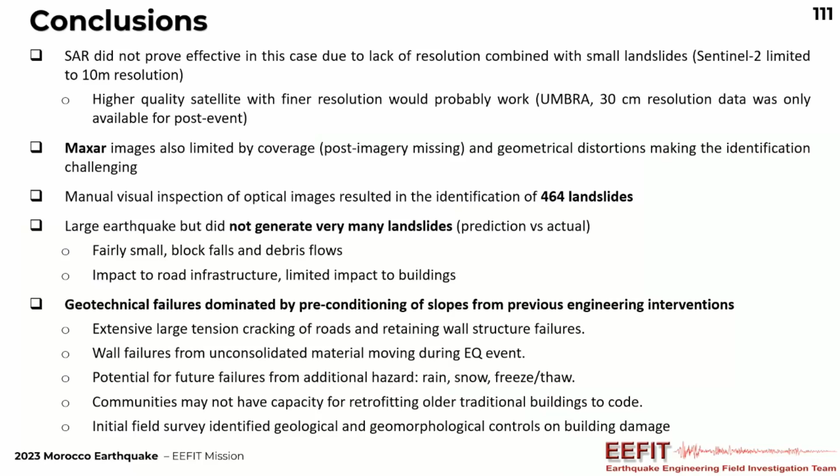And then clearly, all the geotechnical failure analysis demonstrated that many of these failures are connected more to geological aspects than topological ones.

From a structural point of view, you have seen all the different types of buildings we assessed, using remote sensing to improve our ability to understand the damage. We saw many different typologies. One major conclusion is how difficult it has been to understand the building typology and the failures connected to different types, from traditional constructions to mixed construction and confined masonry.

The good thing is seeing how the government has done a lot to preserve the monumental heritage, which has definitely received prompt attention. Reconstruction has started, and there are still so many open questions that need further investigation.

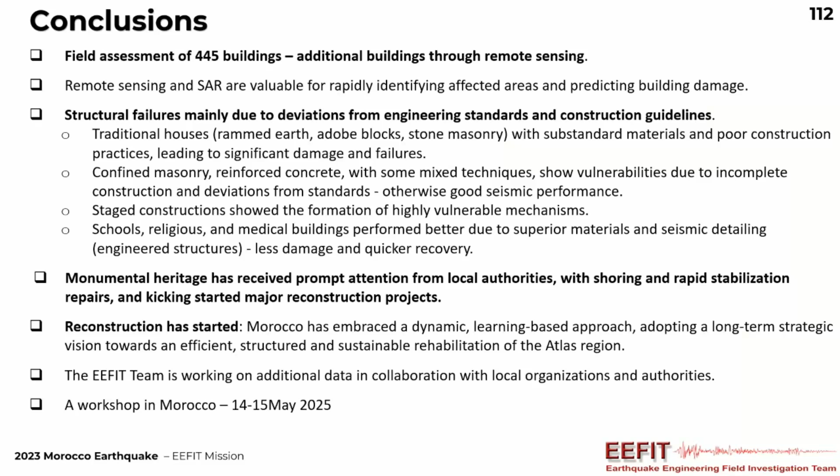This is the workshop we're going to have on the 14th and 15th of May, in about a couple of weeks. It's going to be an opportunity to discuss this further, also with locals. And with this, I finish my presentation.